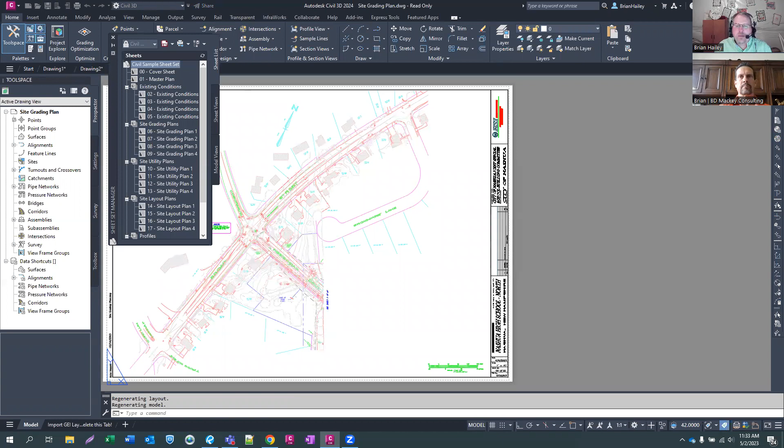All right, so this is just one of the sample files that comes with AutoCAD, for the sheet set manager. And the problem is when you have SHX fonts, right? So we got these evil SHX fonts. I don't know if y'all can see that or not, doesn't really matter, they're just evil. There we go, all right.

So when I plot this, typically what it would do is it either wouldn't do anything, and then you'd just have lines in your PDF that are just lines, or it would create a markup in the PDF that you could then search for, right? But then you have a whole list of markups in the PDF, and it's just really annoying.

So the command is, what is it? PDFSHX is the command. And before there were two variables to it, 0 and 1. So 0 was, just plot it, create it like line work. 1 was, hey, go ahead and create it, but put a markup on top of each piece of text so the PDF program could search for it. But now we have a value of 2.

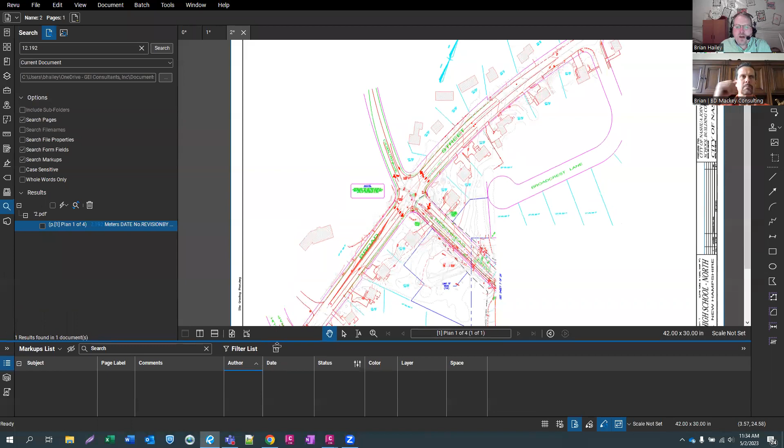So if I go into the help system here, you can see 2 creates hidden text from objects that use SHX fonts. All right, so I've got a couple of files here, and I plotted these using all 3 different methods. So here it is plotted with PDFSHX set to 0.

You can see there are no markups down below here in the markup list. But the problem is if I come in here and say, hey, I want to search for, I'm just going to do a Control F and search SEE SHEET 7, right? It doesn't find anything, because this is not text, this is just lines in the PDF.

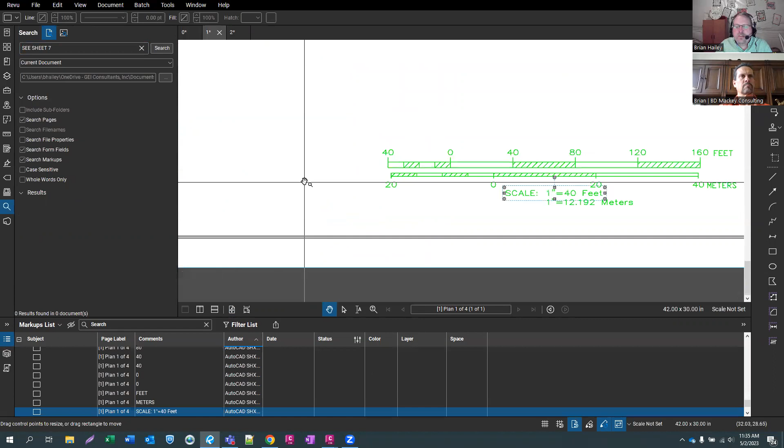Now, if I come over here to this file, and this is the one that was created with PDFSHX set to 1, right? What we have is we have this silly markup stuff on top of it, right? And it's just annoying, and your markup list gets full of them. You can see there's like hundreds of these markups in this sheet, and it's just so freaking annoying.

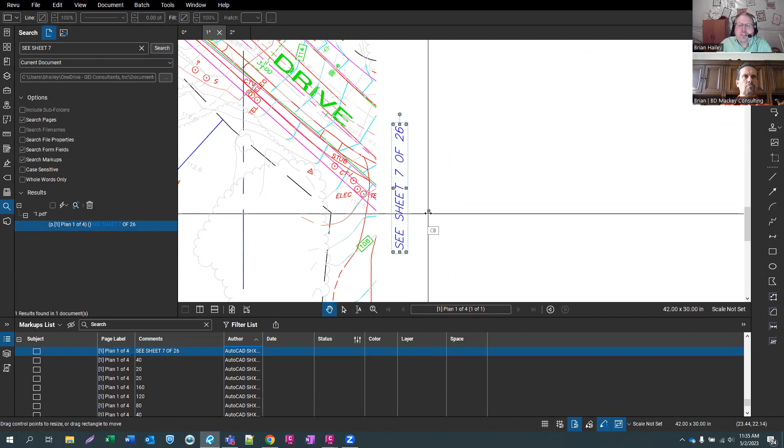But the nice thing about it is if I do a Control F and search SEE SHEET 7, it'll actually find it because it's in the markup list.

But when we have PDFSHX now set to 2, you can see there's nothing in the markup list. And if I select in here, there's nothing to select here. But when I do a search, Control F, SEE SHEET 7, it still finds it.

So this is a new system variable that's available now in AutoCAD 2024. When you decide to update to 2024, I would definitely recommend setting that as a default. Put it in the ACAD.lsp. Make sure it's always set.

I don't remember, is it saved? It's saved in the registry, so you could do it in the ACAD.lsp as well. Once you set it, you don't have to worry about it anymore. But I know I would have users that might accidentally change it. How they would accidentally change a system variable like this, I don't know, but I know somebody would. So I'm planning on setting this up in our Lisp routines that gets launched when we launch the program.

To always set this value to 2, because that's the way it should be. Unless anybody's heard of any reason why it should be anything other than 2, I'd love to hear if anybody does.

Do you know if that is the default value? I don't know why it wouldn't be, but I know the default value is 1. That's just stupid. Well, things like that, I know they try to keep historic settings, but there's features that are just so groundbreaking. Screw the historic crap and just change it to be what it should be.

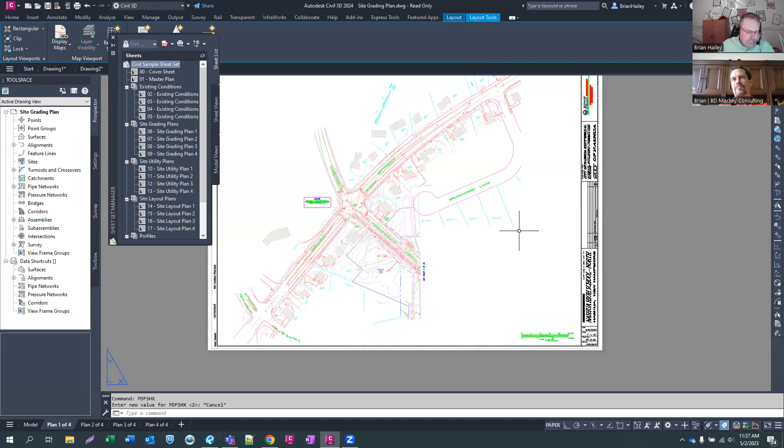I totally agree. Oh, Chris asked a good question: does it bloat the PDF with a setting of 2 versus 1 versus 0? I have no idea, but I've got the file saved here, so let's go take a look.

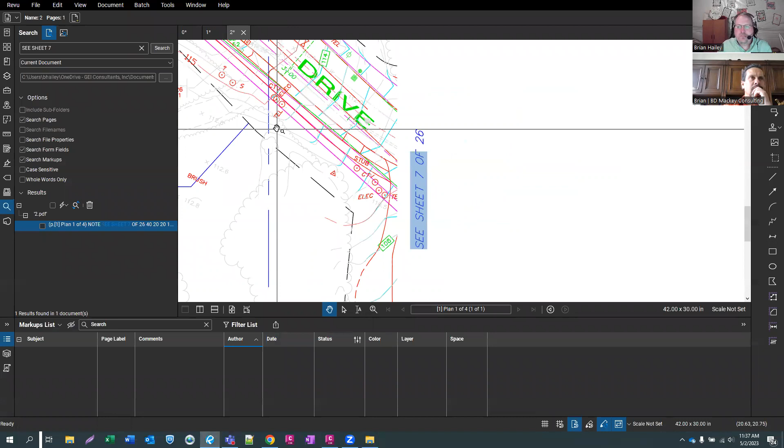See, I put them in here, I believe. Where did I put those? All right, let me just do this, this is an easy way to find it. Where's Revu? There's Revu. If you just right click on the tab, you can explore the document folder. This is a Bluebeam thing, I don't know if it works in other programs as well.

There you go. Yeah, I mean, it's not much bigger. It's 22 more kilobytes, so it's a little bit bigger, but I think it's worth it. If you never need to search for text, set it to 0 and your PDFs will be a little bit smaller. But it does make them a little bit bigger. That's a good point, Chris.

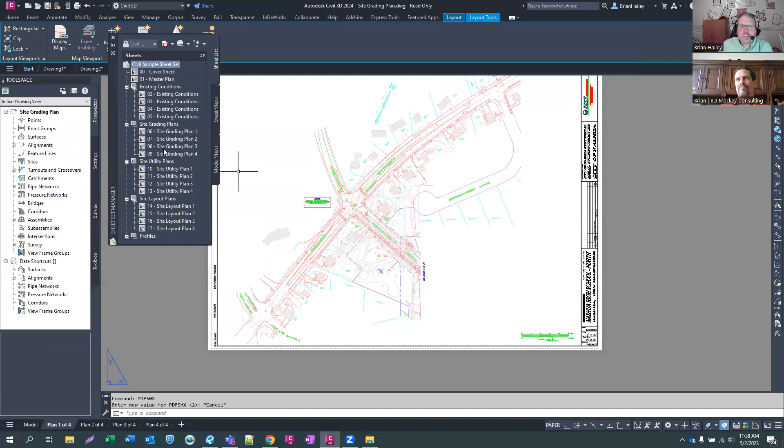All right, so another thing in Civil 3D. So this was an AutoCAD thing I was showing off. A Civil 3D thing that we have now is updates to the subassemblies brought in from Subassembly Composer. So if I bring up my tool space here, I've created a custom one, and I'm going to bring in a subassembly. What you'll notice is there's now an option to link directly to the PKT file. This means that if you have to go in and change the PKT file, you can update the subassemblies in your drawing just by updating them.

And it's really cool. Now, I did discover a little something to be aware of when you're doing this, so let me go ahead and show that. Let me browse to this tailings dam PKT file. And what I'm going to do is create an assembly, not intersection, create an assembly, whatever, don't really care what it's named.

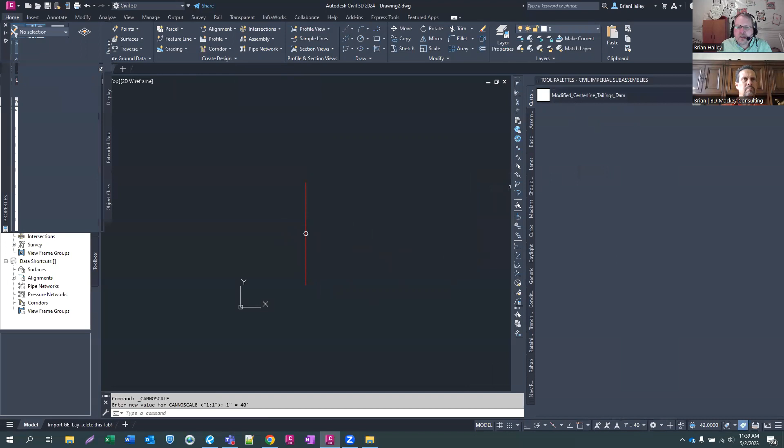Let's set that to 1 inch equals 40, and I'll go ahead and attach that there. All right, actually, let me do it in this drawing. Assembly, there we go, that's a little bit more default AutoCAD-like. All right, and so there's my assembly.

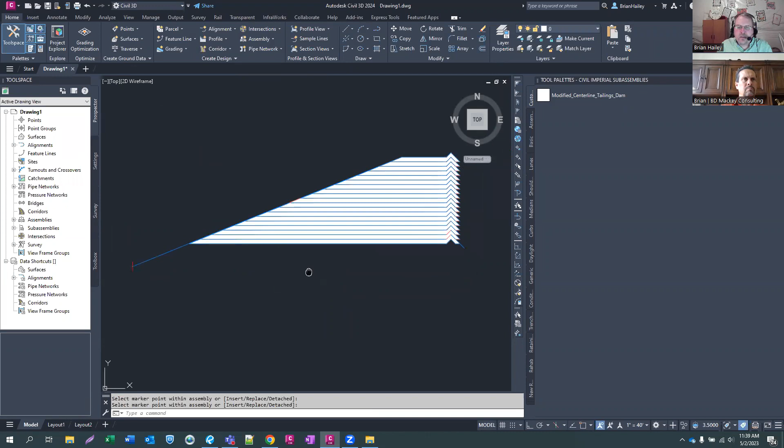And what I'm also going to do is do this again, but instead of attaching it to an assembly, I'm going to create a detached subassembly. So I choose detached, and I'll just place it in here as well. And what you'll notice under the Prospector tab, if I come down here to subassemblies, you'll see those 2 subassemblies in here, right? There's the one subassembly and there's the other subassembly.

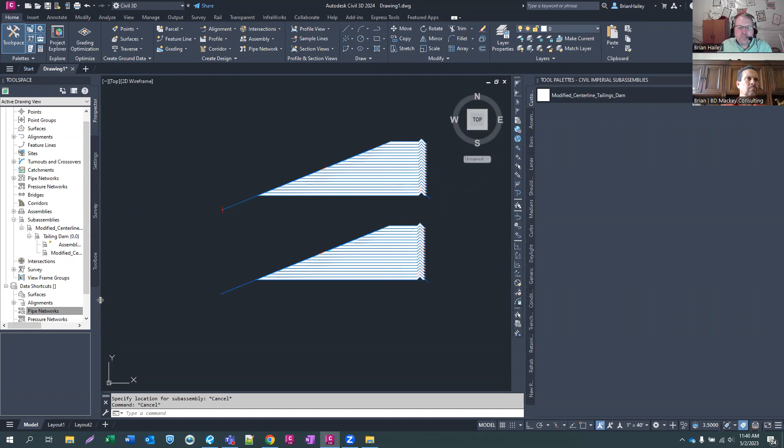Let me make this a little bit bigger so we can see it better. There we go. So now what I'm going to do is go edit the PKT file. Let me go open up my subassembly composer, I think that's just under Autodesk Subassembly Composer 23, 24. There we go.

I'll go ahead and open up that subassembly. And I'm just going to make a change. This is a horrible change, I would never actually do this, but I'm going to change the slope of this very first link here. So instead of using the value that you can input, I'm just going to force it to be a 1-to-1 slope. All right, I'll go ahead and save this.

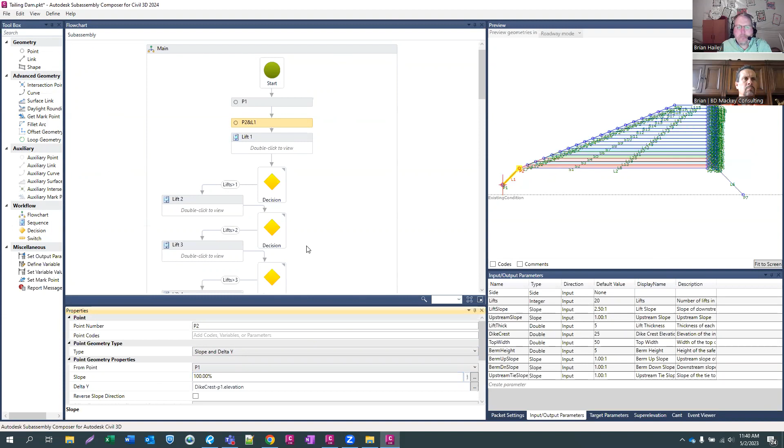Back in CAD, if I refresh my subassemblies, you can see they're now out of date. But if I bring in a new one, and I'll make this one detached as well, you can see the new one now has that new slope, which is just fantastic. This was so annoying in previous versions. You'd have to restart CAD and get things off the tool. Just nasty. But now it works just fine.

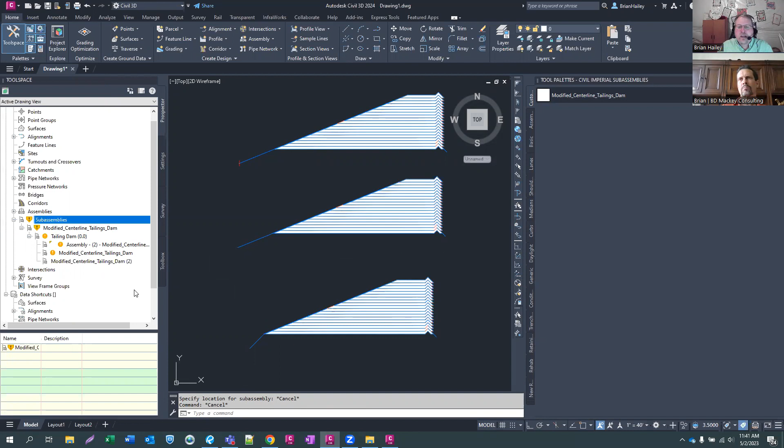For the subassemblies that you currently have in the file, all you have to do is right click on this and choose update all assemblies. And what you'll see is all of the subassemblies get updated, well, except for this one. So what I've discovered is if it's a detached subassembly, it doesn't update automatically. It seems that it has to be attached to an assembly.

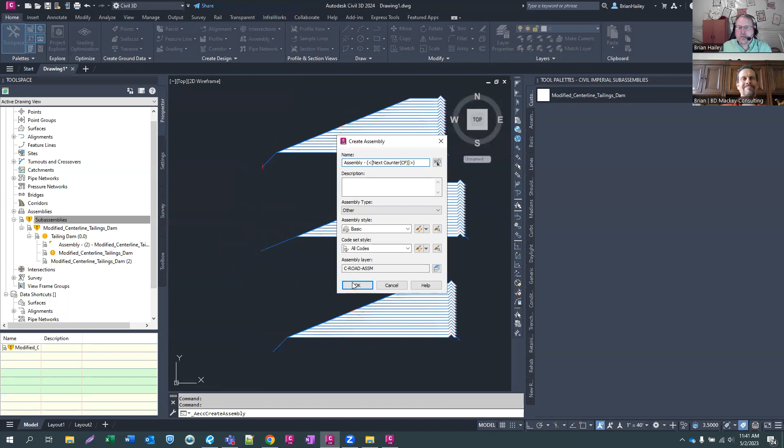Now, I haven't actually tried this. What happens if I take that and attach it to an assembly? So if I create a new assembly here, and I say, hey, I want to add to assembly, and I want to add it to this assembly, then it updates. So interesting, your detached subassemblies don't update when you update your subassemblies.

So those are some of the things that I think are going to be handy when it comes to using the 2024 version. I'd love to hear your thoughts.

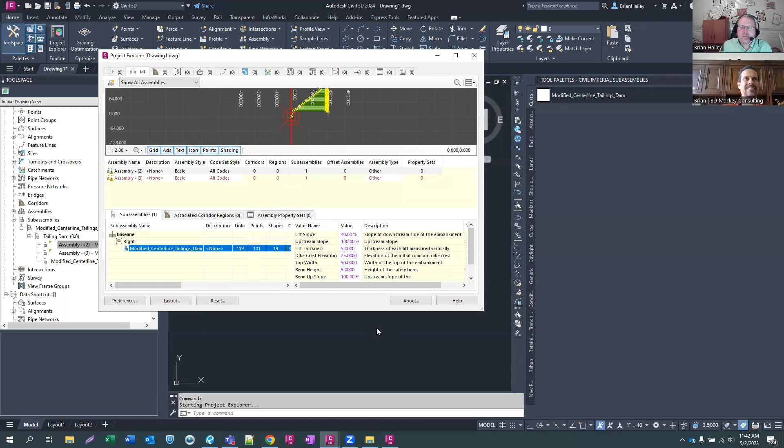Tom said it would be nice to have an open PKT and SAC option and right click. Oh yeah, that would be so nice, just right click on here and choose open. You can open in Project Explorer, which I guess is cool. Project Explorer comes with 2024 now as a default, you don't have to install it separately. So that's nice.

So I guess this can lead into the first question. What is your favorite 2024 CAD improvement? You showed two new things in 24, are any of those your favorite or is something else? You know, I don't know yet, I haven't had much chance to play around with it a whole lot.

One of the other things that I know is available is under pressure network. So if I go to the settings tab and if I go to say fitting styles, and I think this is cool - if I go into a fitting, you know, this would be like for an elbow. I thought there was an option in here. Oh, there it is, you can display as a user-defined block. So he's like, hey, I want this elbow to look this way in plan view. But when it's a vertical bend, it doesn't make a whole lot of sense for it to be bent horizontally.

So you can actually choose a custom block for vertical bends. So if I have a horizontal bend, it's going to use one block. If it's a vertical bend, it's going to use a completely different block. So that's kind of nice. I've had bad luck with pressure networks recently, so they just do some really odd, bizarre, weird things. So they still need a lot of work.

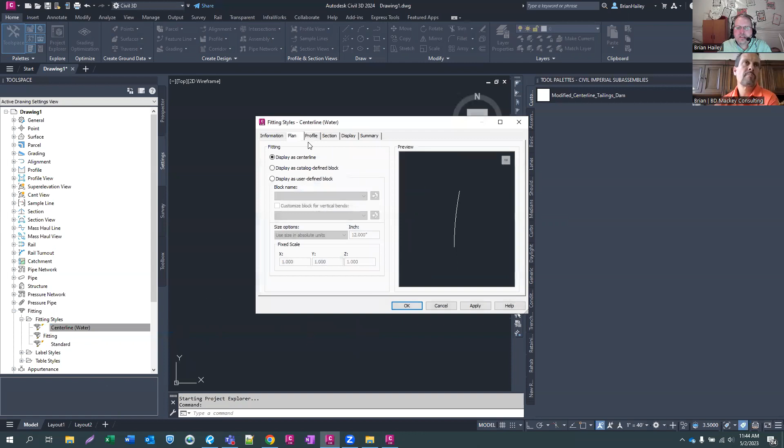But that's a nice thing. I think if I remember correctly, you have the display as user-defined block - I think this is new as well for the profile. I could be wrong on that one, but I'm not sure. I haven't had a whole lot of time to get in and play around with all the features in 2024 yet, but those were a couple that really stuck out to me.

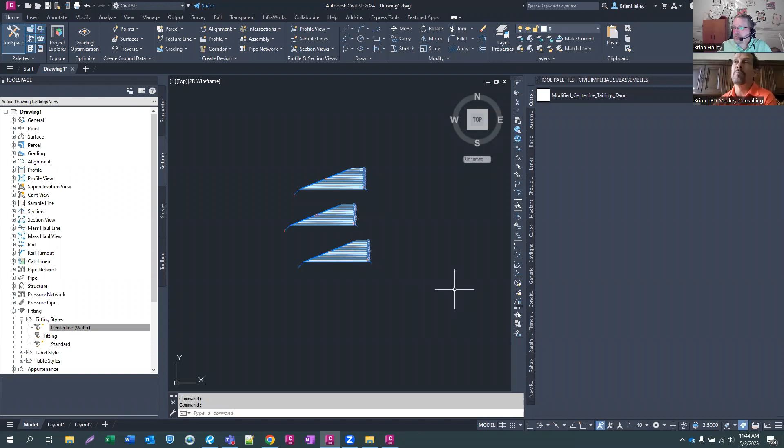Brian said that was needed badly - I'm assuming he's talking about the block visibility thing. And then Brian also said he found out enable DS multi-thread equals 1, and that's when you're setting your working folder over a VPN, he's found much faster speeds.

Ooh, that's a new enable DS multi-thread. What is that? It doesn't find it in the search. Let's see, enable DS multi-thread... Reads files and checks subfolders in sequence while setting the use multi-threading to read files and check subfolders. So to use multi-threading, well, that makes sense. If you have more than one core on your computer, I would like to be able to use them.

But yeah, by default, it looks like it's set to off. Thanks, Brian, I'll have to give that a try. Is this new in 2024? Is it in 2023 as well? Do you know, Brian? New in 2024, okay, 2024. Cool.

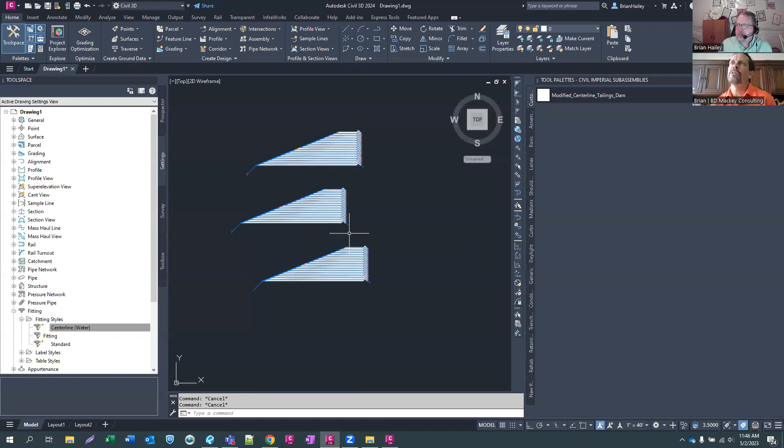All right, so only a few more questions. As Brian's talking, if you guys come up with other questions, pop them into the questions and answers. But we have one here from Lisa saying, can you walk through CAD Standards Manager?

CAD Standards Manager. Are you talking about just the concepts of CAD standards, or is there something specific that I don't know about yet? Are you talking about like the CAD standards checker?

Let's see, that's under, I think, no, it's down here. If I remember correctly, where's my CAD standards? It's one of these, I think. CAD Standards Checker, okay. Do I have it on? I thought it was down here. It's been a while since I've used this. Okay, it's not there.

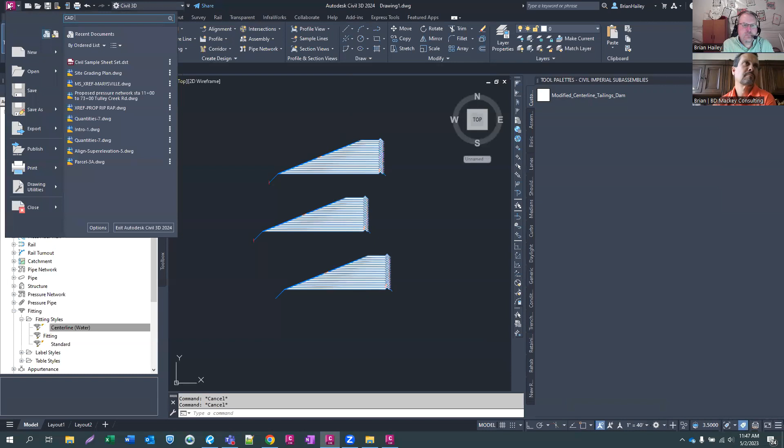So yeah, there it is, under Manage CAD Standards. Okay, so really there's two different topics here when it comes to the CAD standards checker.

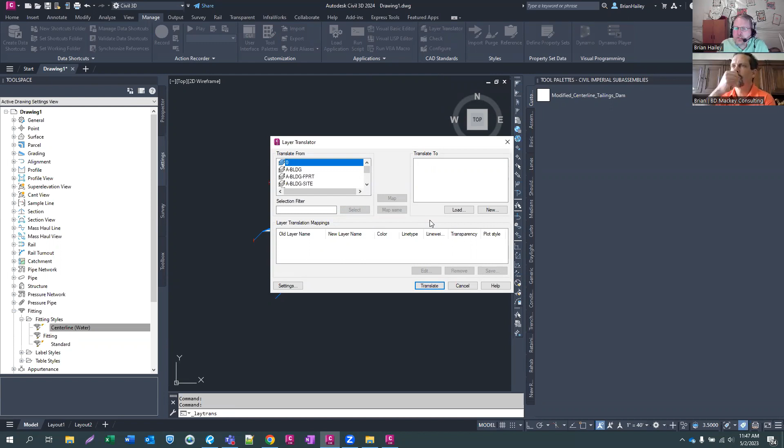You have what's known as a layer translator. This would be great if you're constantly getting a set of drawings from one source and you want to take their layers and convert them to your layer standards. For example, working with a surveyor who is set in their ways and won't use our layers, but uses their own layers consistently. So what we can do is create a layer translator.

Let me make this a little bit bigger here. So over here on the left, we have the layers that are in this drawing, and over here on the right is what we want to map them to. Now, in order to map them to something, you have to have the layer. So I'm going to go ahead and load a drawing, and I'll use the GEI template here. Let's see, CAD support, Civil 3D templates.

So when the surveyor sends me a drawing and it has the layer A-BLDG in it, that's not part of my standards. I would much rather it go onto this specific layer here, and I just kind of picked one at random. So I can now map this, and it's going to take anything that's on this old layer and put it on this new layer, and here are the properties of the new layer.

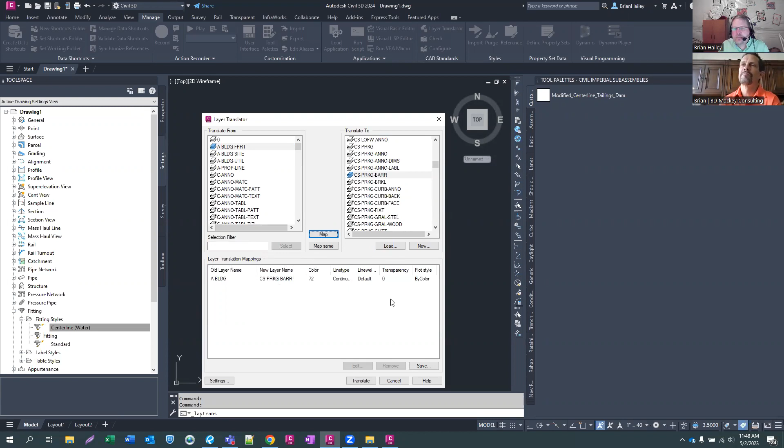Now, you might have some layers that are exactly the same, so you don't want to have to go through and pick it over here, like layer 0. I don't want to pick layer 0 over here and then layer 0 over here and then map. You can just click map same, and any layers that have the same name will map to each other. So it's going to take the C-road-mark from their drawing and map it to the C-road-mark from my template, and it'll set my layer standards for that layer.

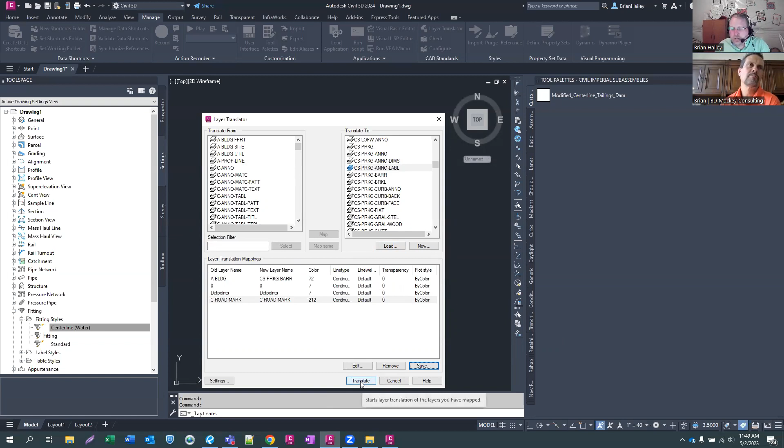And then you can go through and do these for the rest of them. Once you're done, you can save this as a standards file. If I just click save, you can see it's saving it as a DWS. So the next time you get a drawing from that person, you can just load that DWS file and hit translate, and you're done. All of their layers are converted to your layers. So that's one aspect of it.

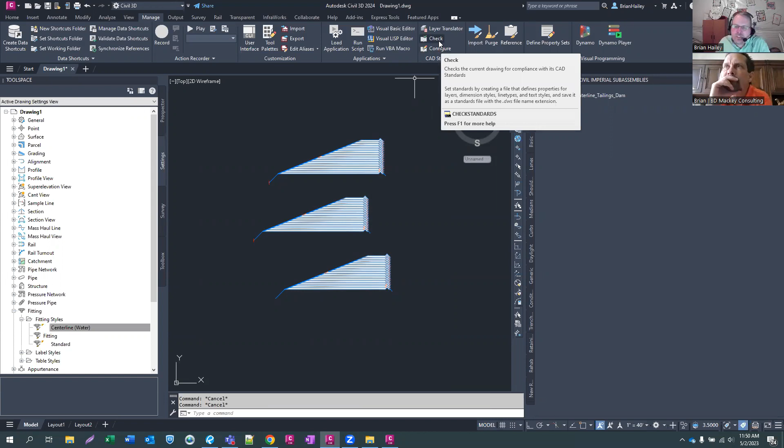Another aspect is, I should also clarify the configure option, which it looks like you're going into. Yeah, so we can also check our drawing against a standards file. Basically this says, okay, the way this drawing is set up, does it meet our standards? If I come in here and choose check, it says hey, there's no standards file set up, so it's not going to work yet, but we have to apply a standards file.

So what you need to do is create a standards file that has all of your layers, all of your—let's take a look—all your dimension styles, your layers, your line types, your multileader styles, your text styles. You have a drawing that has all of that in it, and then save it as a DWS, a drawing standards file.

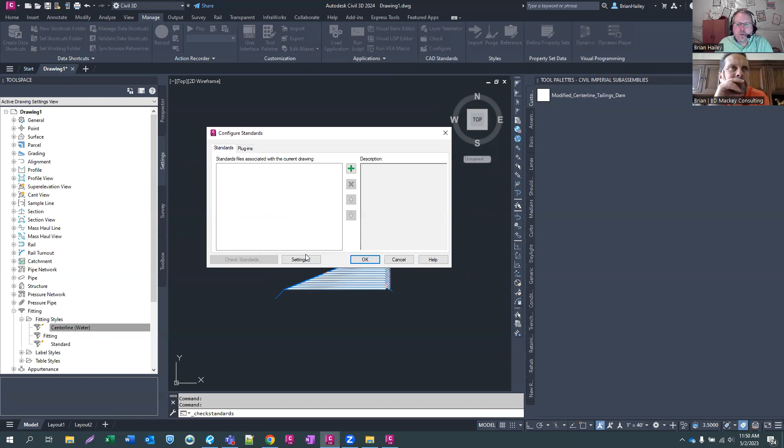So let me go ahead and load one up here. I'll go ahead and add a standards file, and we have ours. CAD Support, Civil 3D 2023 - I think I put it in the template. Yep, there we go. So you can see these are DWS files, and it's basically our template saved as something else - actually no, because I created this overall standards file, and this has all of our standards in it.

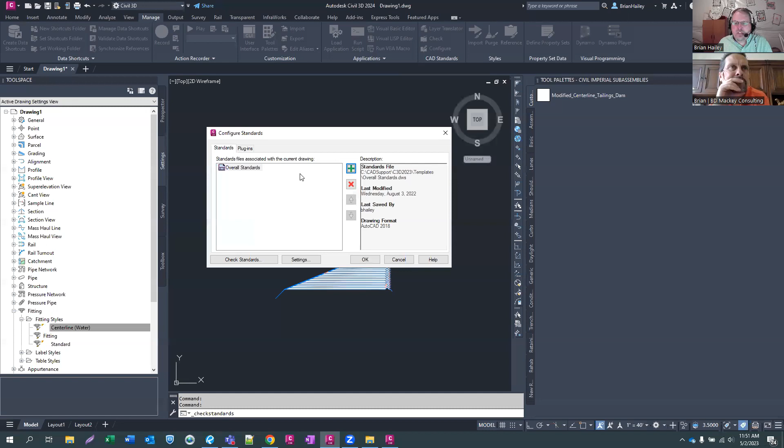If I come in here to the settings, I can do different things. For example, I can disable the standards notification, so if somebody is working in this drawing and it has a standards file assigned to it, when they do something outside of the standards, they won't know about it. You can display an alert upon the standards violation, or display the standards status bar icon, check standards settings, and you can automatically fix non-standard properties.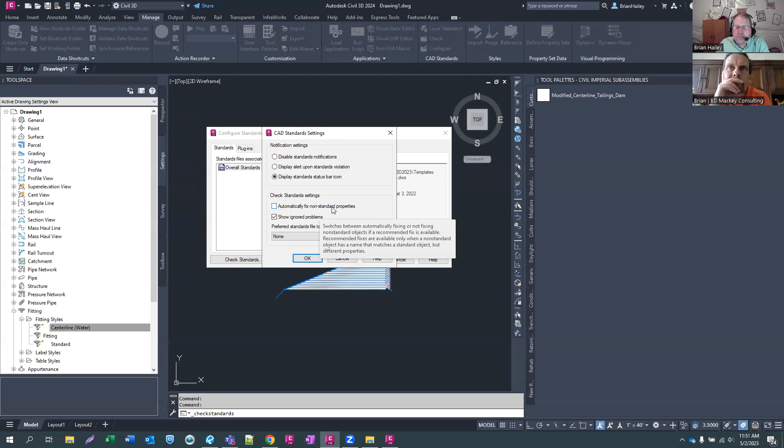So if I go in and create a layer that has the same name as a standard layer, it'll go into my layer and fix all those standard properties to match the layers that are in the standards. So I'll click OK now, and now I can check the standards.

It comes through and says, hey, these are all of the issues. So layer 0, the properties are non-standard - I'm going to go ahead and, I don't know why it's not letting me fix it. I'll just choose next, and it goes to the next one. It's probably because of that.

So here's a non-standard layer. C-ANNO-TABL-PATT is not one of our standard layers, so I want this to go on the A-ANNO-TEXT layer. I'll go ahead and fix that, and it's going to convert that layer in my drawing to match the layer in my standards. You would just go through and set all of those correctly - that's kind of the way the standards checkers work.

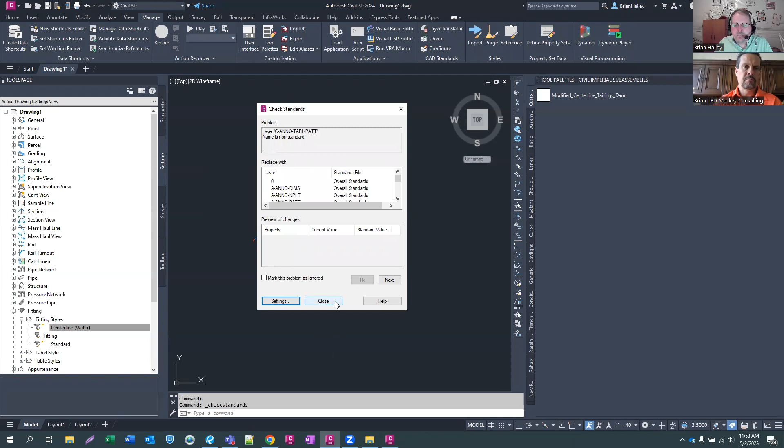This will go through and check things like dimension styles, text styles, etc. Hopefully that helps you out. Do you have any other questions on that?

Oh, you got rid of the question. Who was that again, Brian? It was Lisa, sorry. Lisa, no worries - if you have any other questions on that, let me know and I can get into more depth.

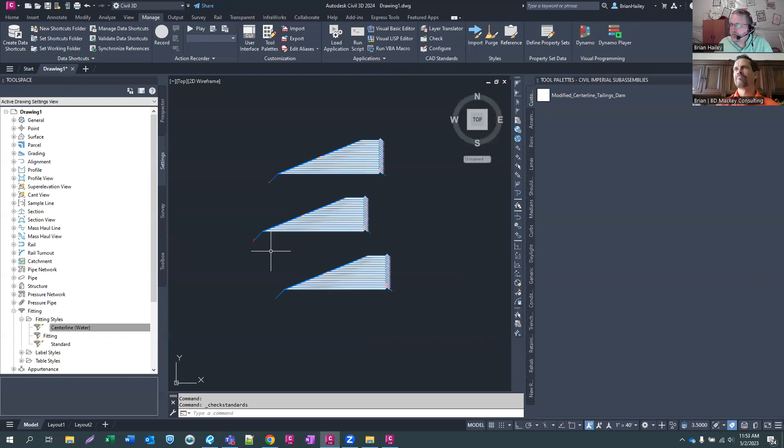Great. Since you're still in Civil 3D 24, we'll go to the next question from Jason: have you tested the new subassembly deployment tricks in Civil 3D 2024? I have, and I showed them off at the beginning - that was what I was doing with all of these here.

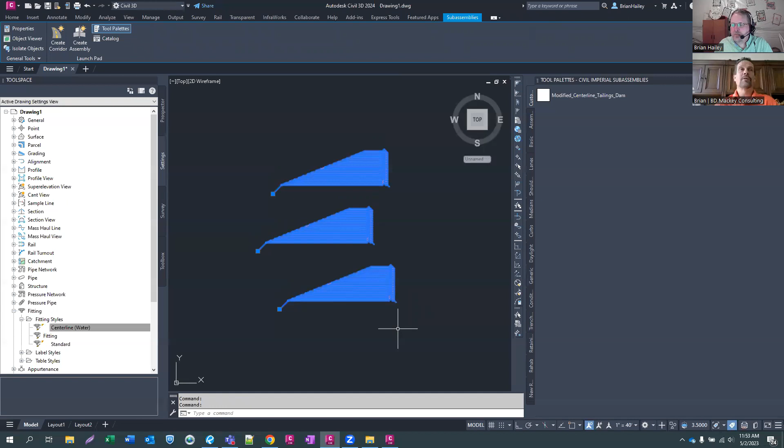I think you said the deployment tricks. I think that's what he's referring to - correct me if I'm wrong, Jason. Same thing. Yep, same thing.

All right, then we will jump into a question from Scott: how about BMP for 5 miles of roadway and extreme topo, 1 mile pieces, question mark? I have no idea, I'm not sure what the question is.

Are you talking about like stormwater BMPs? That was a question from Scott. Yeah.

Profiles, roadway design - so you would like to see the process of creating plan and profile sheets? I'm not exactly sure what you're looking for here, Scott.

Best practice for dealing with a 5-mile roadway, break it up or all in one, running out of memory. Ah, gotcha, so performance issues.

BMP, best management practices - not like stormwater BMPs, like a straw wattle or a silt fence or inlet protection. That's what I was thinking when I saw BMP. My bad.

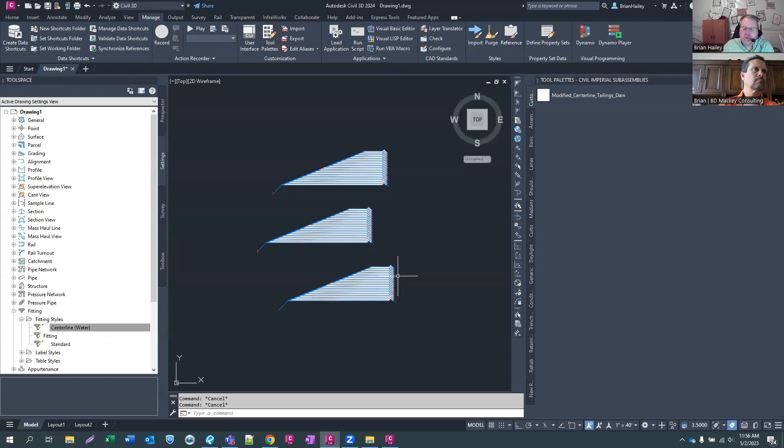If your surface is massive, you might want to tile it up, so you can create a crop surface. Let me see if I can find a decent surface and just do this here real quick. I'm just going to create a new drawing. I have a surface - let me set my working folder. So this would be... I think this is where it was. Yep, there we go.

So I'm going to bring in this existing ground surface - this isn't a roadway example, but it's the concept. All right, so I've got a surface in here, and this surface is massive, and I don't want to bring this surface into every single one of my drawings.

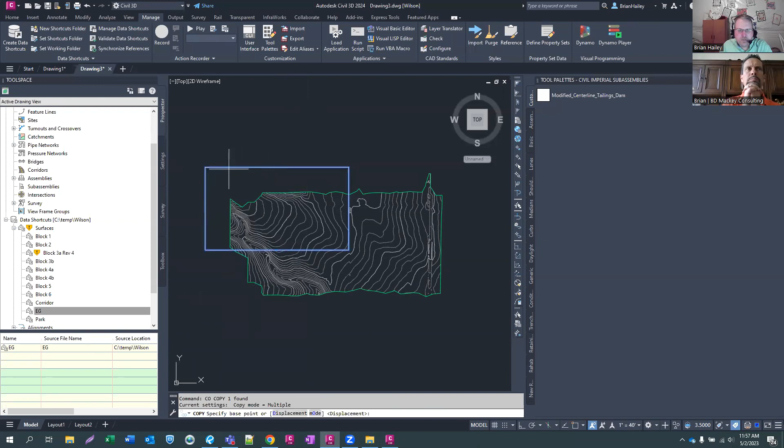So what I can do is tile it up. If it's a roadway design, you'd probably want to do it in linear chunks, but I'm going to cut this up into 4 surfaces. So let's see, we'll do that one there. All right, so those are the 4 chunks that I want to break this particular surface up into.

Maybe we'll adjust that a little bit, center it a little bit better. There we go, something along those lines, right? So what you can do is create what's known as a cropped surface.

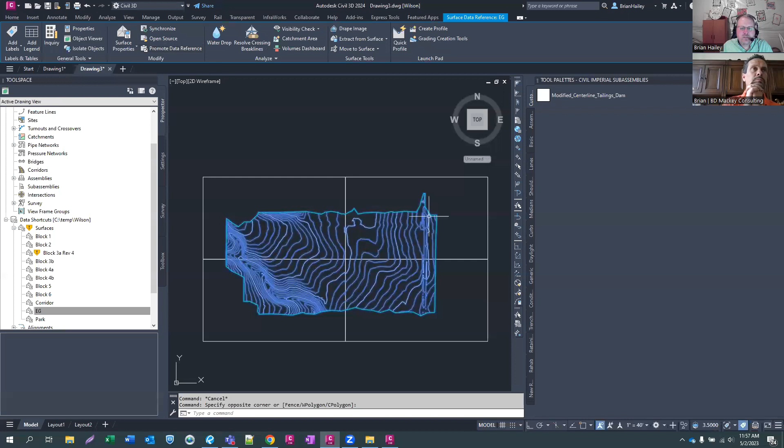So if I go to the Home tab, surfaces - I probably have to promote this first since that was a data reference. All right, so under surfaces, I can create a cropped surface, and what this will do is create a new surface in a new drawing. Oh, we got to save the drawing first.

Let's see, let's throw it there. All right, so this will create a new surface in a new drawing that is just a piece of it.

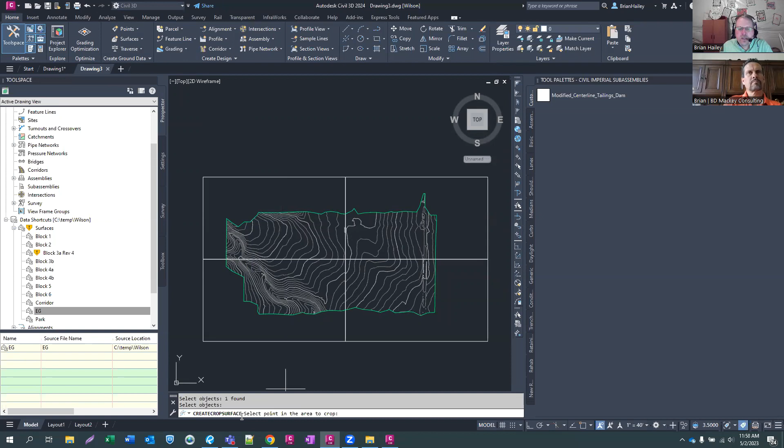So to select the crop area, I'll go ahead and select an object - I'll select that polyline, which is what a rectangle is. Select a point in the view area to crop. I'm going to have this create a new drawing, and then it's going to ask me for the template, so I'll just use the Civil 3D template since I don't have 2024 set up for the GEI standards yet.

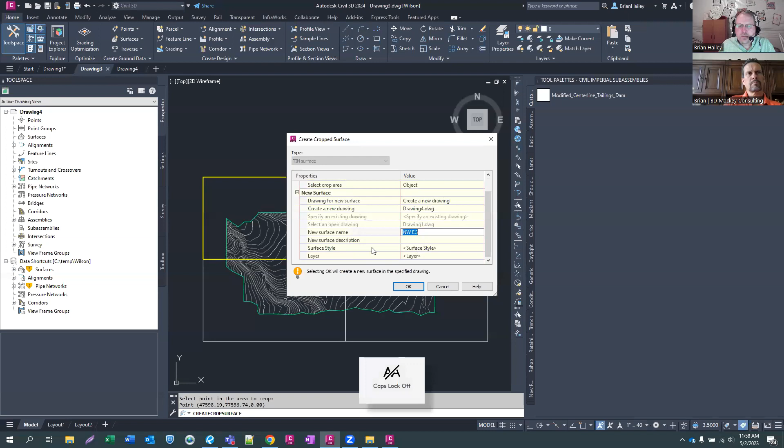Give this a name - we'll call this the Northwest EG. The surface style doesn't matter, the layer doesn't matter, you can put that stuff in there.

And what this has done is created a new drawing that has just that corner of the surface in there. Okay, maybe I should have done a better surface style. Oh come on, I like the rainbow surface - isn't that beautiful? Right, and so you can see it's just a piece of the surface.

And then I can create a data shortcut for this and then data reference it into the sheets where it would be displayed. So I could break this up into maybe 1 mile chunks, half a mile chunks, whatever you think would be beneficial.

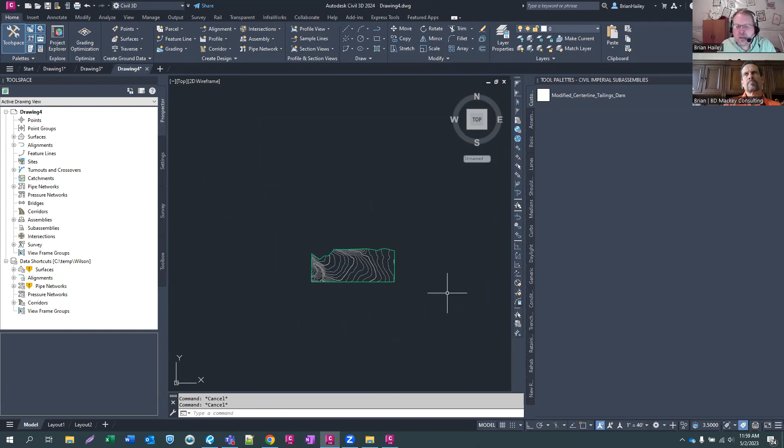And then this particular sheet is going to see 2 of the surfaces, so you just data reference those 2 surfaces in, and you don't have the massive surface for the entire project in your drawing. Now, what happens if the original surface changes?

Right, so let's see - you have two people questioning you on this, saying is that crop surface linked back to the original or static? Yeah, that's a great question. So again, what happens if this original surface changes? Well, this surface here won't change.

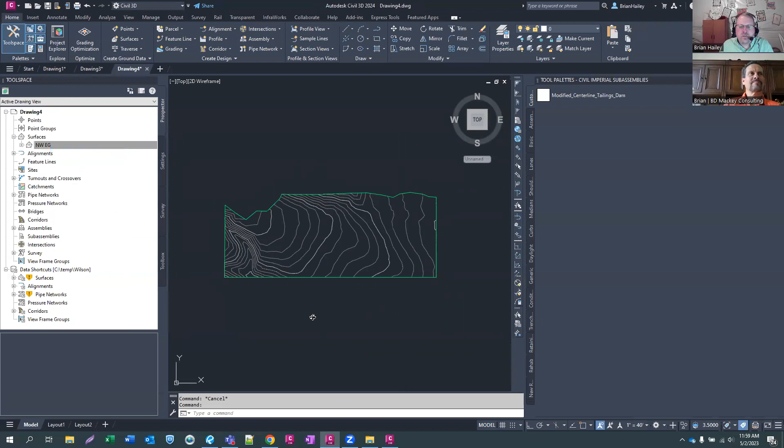And the reason it won't change is because there's a snapshot on it. So if I go into the surface properties here, you'll notice under the definition it created a snapshot. And basically what a snapshot is, it's saying hey, ignore all the data and just keep the surface. So when the surface rebuild happens, it starts at the snapshot and then continues on down through the list.

So if you want this crop surface to update when the other surface changes, simply get rid of the snapshot. All right, so let me go ahead and remove it from the definition completely here.

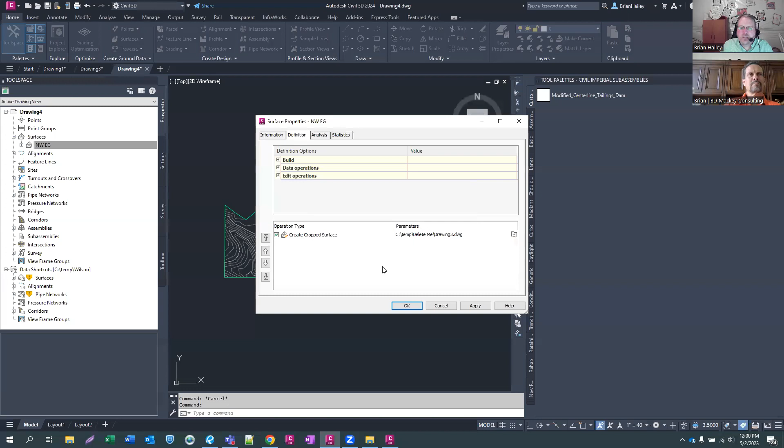And then I'm going to come back here and make a change to this surface. Let's see, let's just do something stupid here. I have to do this - surface, EG, breaklines, we'll add that as a break line.

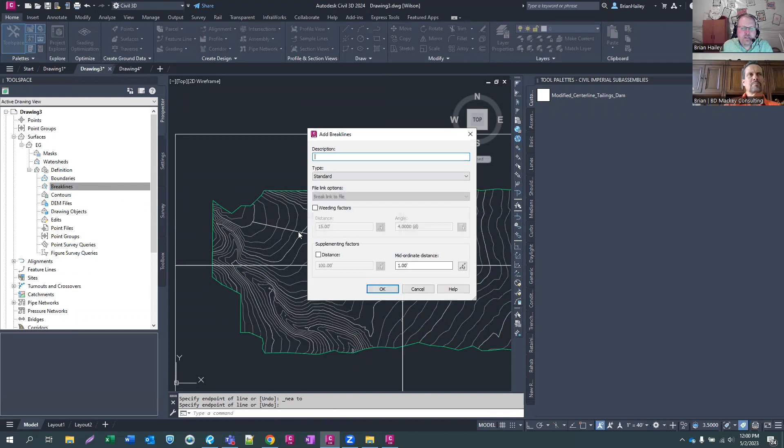All right, well that's lovely. Anyways, it's a change, so I'll go ahead and save this drawing. And then what you would have to do is go into each drawing and just rebuild that surface, so you can see the surface is out of date. So now when I rebuild it, you can see it now has the hole in it as well.

So it is somewhat linked to the original surface - you just kind of have to manually go update it, which isn't that big of a deal.

So that's one way to help you minimize the amount of data that's in any given drawing, because typically it's the surface that just bogs things down. You've gone out and flown the LiDAR for 5 miles of road, that's a crap ton of data. You don't want all of that data in your drawing, so create crop surfaces.

So Chris asked, would it be a better option to use subsurfaces with data clips under them? Basically that's what you're doing here, you're clipping out the data.

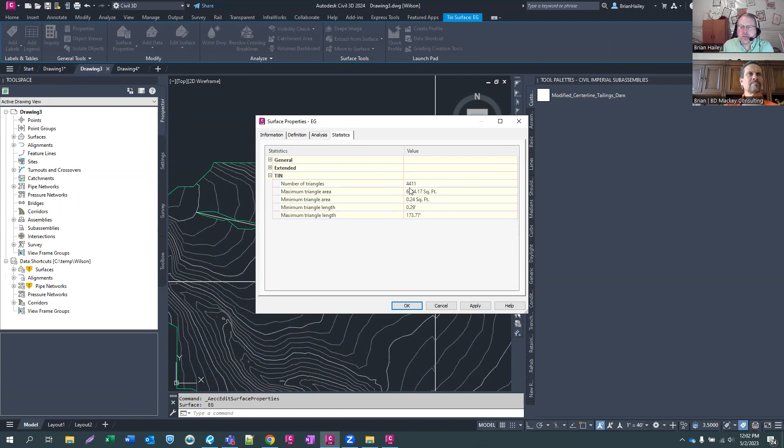So if I come into the source surface here and go into the surface properties, let's take a look at the statistics. General, where's the number of points? Number of triangles, 4,411. That's easy to remember. And if I come into this drawing, it should be about a quarter, depending on how well I drew that. You can see it's 1,049. So I have clipped out 3/4 of the data, I only have a quarter of it here.

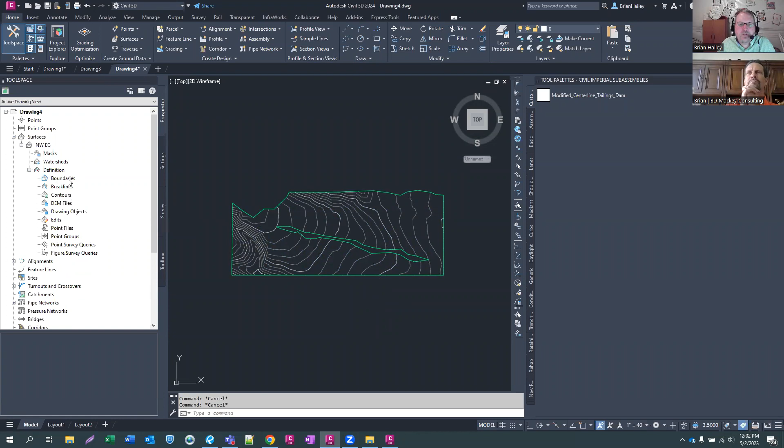Data clips, that's for if I don't want to... let me talk about that real quick. When you go create a boundary for a surface, you have the option to create a data clip boundary. Basically it says, hey, I've got a whole lot of data that I'm going to add to the surface, but I don't want to use it all. I only want this small little piece here. So you can put a data clip boundary around the piece you want to keep, and it'll clip out all the data outside of it. Now, that is not a real boundary, it is a data boundary, not a surface boundary.

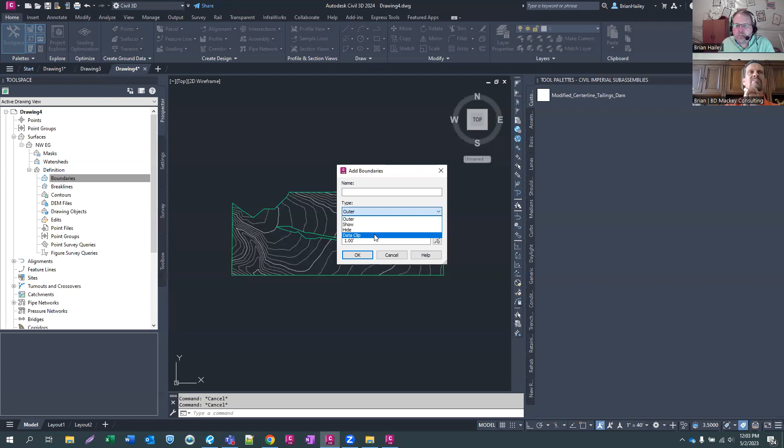Let me go open up a drawing here and I will demonstrate this. Program data, Autodesk... this is where it is? No. Not program data, should have been program file, sorry. Autodesk, there we go. AutoCAD 2024, C3D, help, civil tutorials, drawings, and let's go to one of the points, one that has a lot of points in it. There we go.

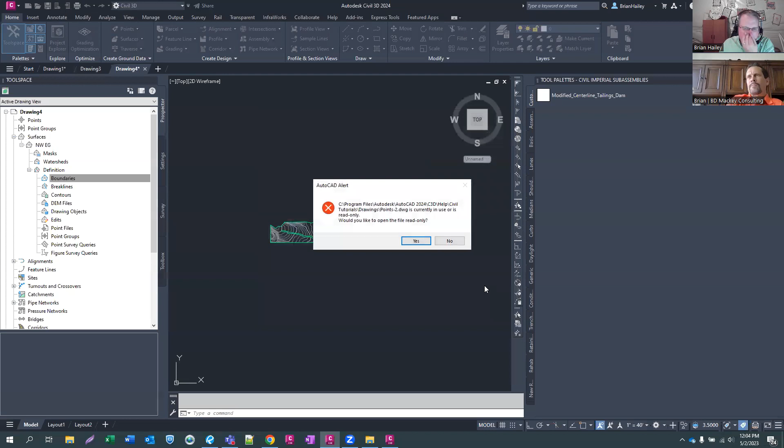So as you can see, this particular drawing has a whole lot of points in it. So I'll draw a nice little boundary, not a rectangle, I want a polyline in this case. I'm going to draw this nice little boundary that looks something like a horseshoe. What you do is add the data clip boundary to the surface first, and then as the data comes into the surface, anything outside of the boundary is ignored.

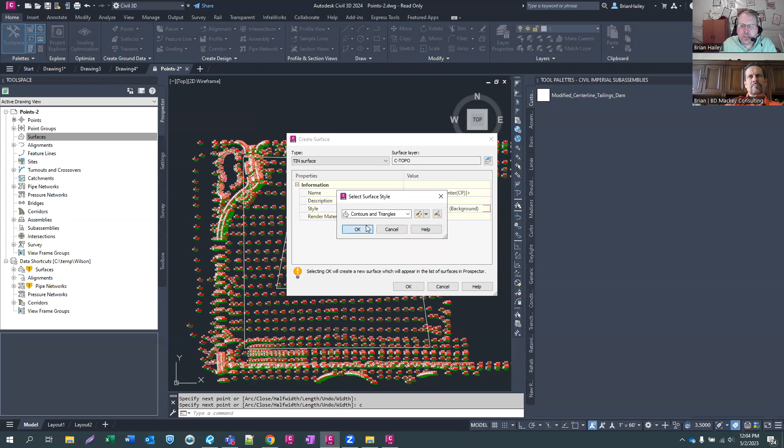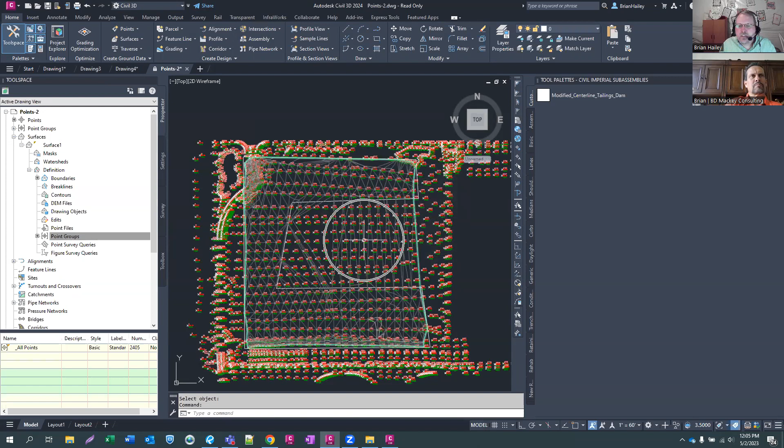That's all the data clip boundary does. So if I go create a surface here real quick, let's give it a nice triangular one, contours and triangles. There we go. And then I'm going to add that polyline as a data clip boundary, and add in all the points, the all points point group. And what you'll notice is it's still triangulating outside of the data clip boundary. It's not a boundary, it's a limit to what data gets added to the surface.

Now, if I don't want any surface here, I could just go add it as a boundary again, and this time make it an outer boundary. And then it trims it up. So that's just something to be aware of. I don't think a data clip boundary would necessarily be helpful for that big, long roadway type situation, I think crop surfaces would be much more beneficial.

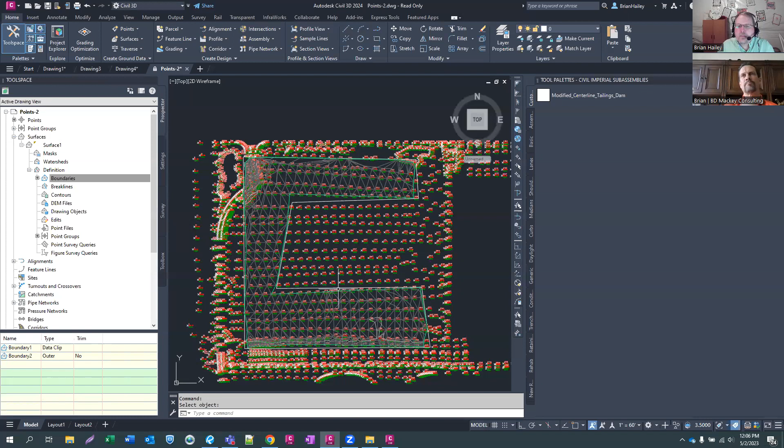Cool, and are the crop surfaces advantageous to doing this versus a boundary to the original surface? So Scott said, is there an advantage to your original idea versus a boundary to the original surface? The crop surfaces versus just a normal boundary, is that the question?

Yeah, so the crop surface is again a piece of another surface. If you wanted to, you could create 5 different surfaces using the same data and put boundaries around them. In that case, I would use a data clip boundary. But then you have 5 different sources of data, drawing A has a surface, drawing B has a surface, drawing C has a surface. If I change the existing ground data, I have to change it in all those drawings. Whereas with a crop surface, I change it in the source drawing, and then I just update all of those other drawings.

It makes sense to this non-Civil 3D user. Tom followed up with your horseshoe boundary there. What about a mask? I think that came up when you were talking about your horseshoe outer boundary versus that.

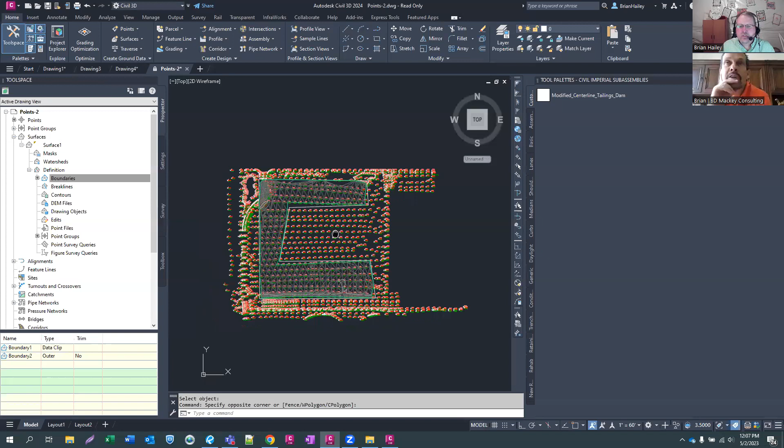All a mask does - so a boundary says remove the surface, so there is no data there. A mask says hide the surface. There's still data there. You can cut profiles through it, you can still label it, I just don't want to see it. So that's what a mask will do.

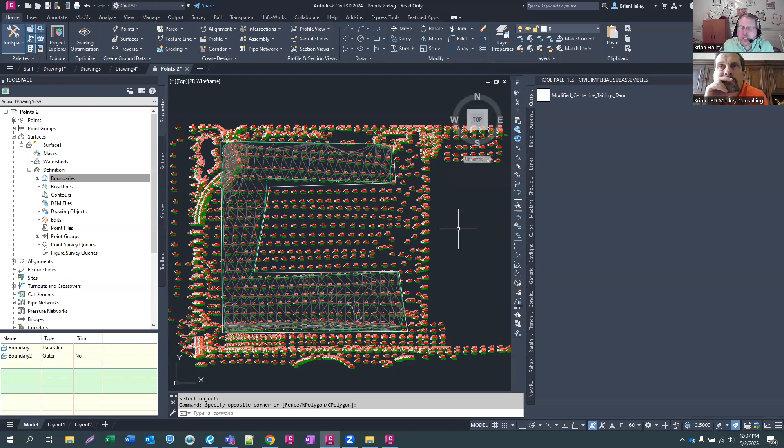So if you're doing volume calculations, it's still going to use the masked area in those calculations, whereas if you put a boundary around it, it won't, because there is no surface there. Hopefully that helps.

Scott said yep, he did exactly what you displayed, so at least you're validating what he had already done. I'm curious, Scott, did you know about the snapshot in the crop surface where you can disable that and have it update? I don't know, I'm just curious how many people actually know that. So he did not. Oh cool, so you did learn something new. Yes, life is complete - somebody's learned something from me.

Snapshots are used with that LandXML update as well. Yeah, so if you import a LandXML file, it'll create that snapshot. That way you don't have to keep the LandXML file. But if you change the LandXML file, your surface won't update - but you can remove the snapshot and then it will.

And Adam said, keep in mind, if you data reference a surface into another file to data clip and/or boundary it, your file will actually be larger because you have the original surface plus the data clipped result. Yep.

Yeah, I really think the crop surface is the way to go. And John agrees, I don't think people use crop surface nearly as much as they should. John agrees the crop surface is the best way to limit Civil 3D data in sheets outside of 2D Pline, XREFs, or contours, and DREF in surfaces with hidden styles.

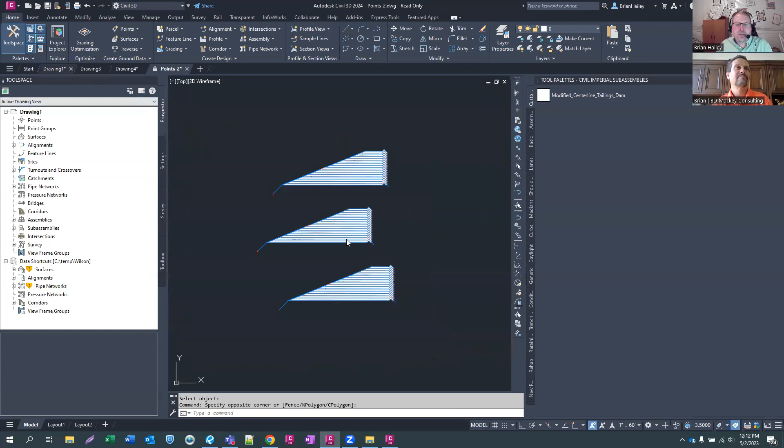I'll create a polyline and we'll go into units. As you can see, this particular drawing has precision set out to 4 decimal places. I'll change this, was he using degrees, minutes, seconds? Surveyor's units, we'll do surveyor's units, and set it out to something ridiculous like that. So that's the way it's set in this particular drawing. So if I WBLOCK this out, I just type W.

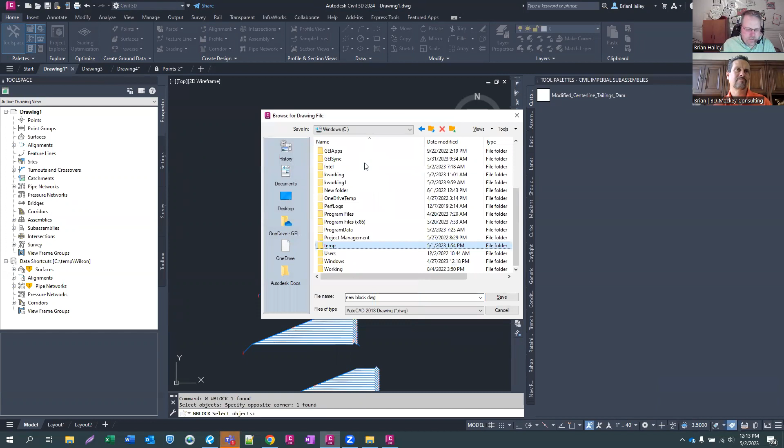Let's see, we'll choose objects. Did I select the objects? Can't remember, oh that's not what I want. Select the objects. All right, once selected, we'll go ahead and save this somewhere, C:\temp, delete me, we'll call that new block. Replace the existing new block. I don't think this has anything to do with it, but I'm going to say no for now. And then we'll go open up that drawing.

So my question, and this is actually something Chris came up with, I thought way back in my days of AutoCAD there was a setting to say what template you were using when you WBLOCKed something out. So it looks like it did maintain the precision and the units and everything.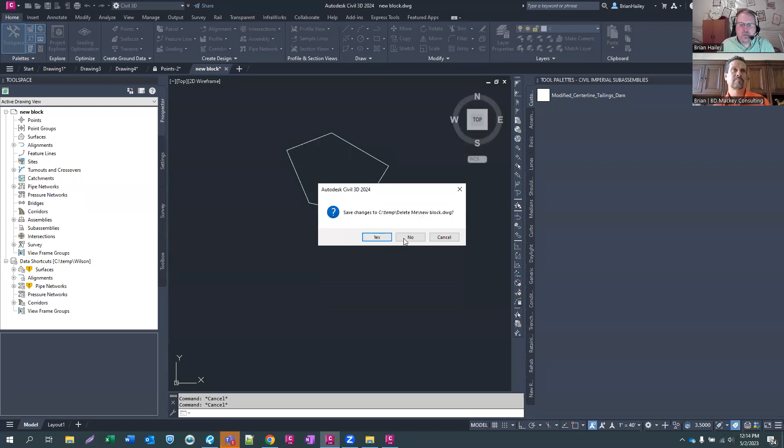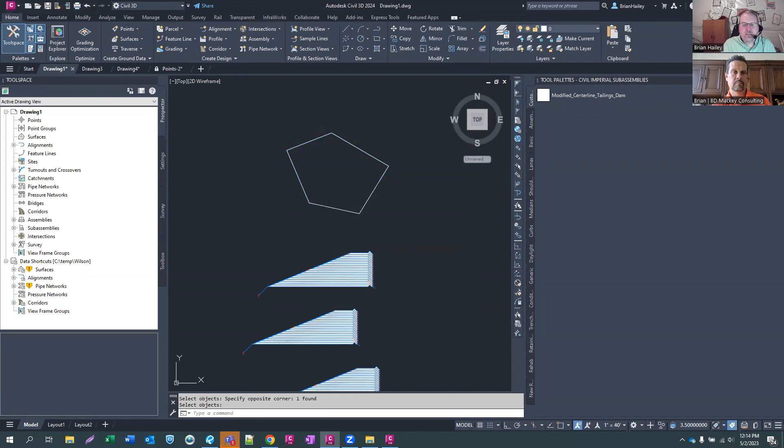So let's try that again, and this time I'll change the units again, just to make sure I didn't just magically pick the same ones. I'll change this to ridiculously big, and just a little big there. I hit yes that time. Yeah, so it is maintaining the units of the drawing that I'm WBLOCKing out of. So I don't know why yours wouldn't be saved.

I'm saying it could be a fix in 2024. I could launch 2023 here real quick. What version are you using, Thomas?

Thomas, are you there? He left, he's not going to see the answer to his question. Oh no. He might be on mute, he forgot to unmute his keyboard.

Simon asked, is this block used for AutoCAD? Then AutoCAD may convert the unit back. It's an AutoCAD command, so I don't think there would be any difference in Civil 3D. I think Simon's saying if you opened it in AutoCAD without Civil 3D, would it be different? It shouldn't, because it's an AutoCAD setting. Agreed.

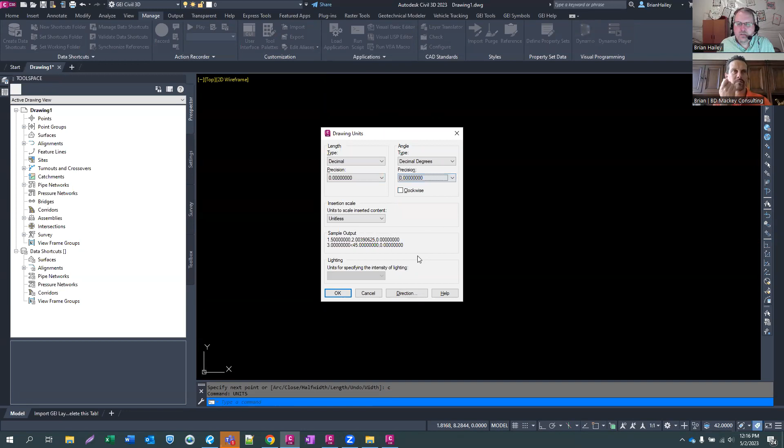Okay, so let's see, polyline, units, set everything ridiculously big. Did I close out of that other new block? Oops, wrong one. And C:\temp, delete me, a new block. Replace? No. Now if we open.

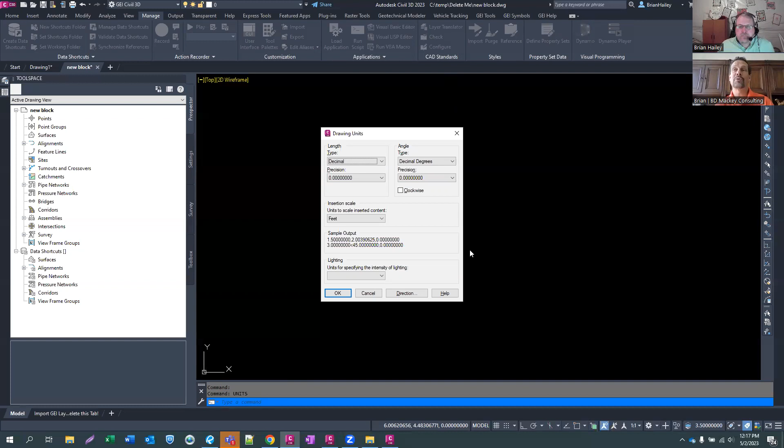Go into the units. Come on, you can do it. And they're both ridiculously high, so it's not a 2024 thing. So Thomas, I don't know why it's not preserving your units if you watch this after the fact, but we now know that there is some sort of setting, more than likely, that can be changed, because it's doing it to him.

Suppose we should go check the super secret units. So Simon did say he's noticed if he exports out of Civil 3D and then opens in AutoCAD, often his drawings are set to be unitless, even though he set units in Civil 3D.

Let's see, there's a solution. Oh, that's a great solution. Yeah, I posted up this question, I found out what it was, I'm just not going to tell anybody. All right, that's enough of that one.

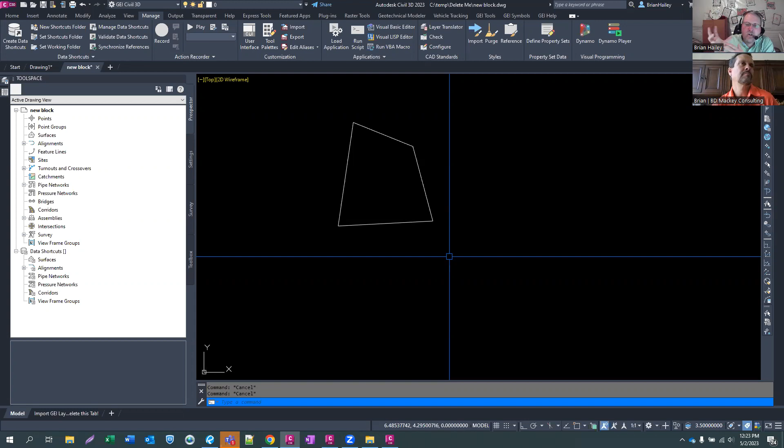And then you have your model drawings, and this is where you're doing your Civil 3D modeling. This is where the drawing is going to have my existing ground surface in it. I'll XREF in the existing line work to help me create the surface. I'll have my pipes in their own drawing, and in this drawing I'll data reference in the existing surface, data reference in the proposed surface, XREF in the line work, and then I'll design my pipes.

And then when you get to your sheets, you'll have things referenced into the sheet. So I'll data reference in surfaces and alignments and profiles, and then I'll create the profile view for that sheet. I'll XREF in the line work, and I only bring into the sheet what's needed for this sheet, right? Really, I can't stress it enough, only put into a drawing what you need to create that drawing.

If you can keep extra stuff out, do it. If you put everything into one drawing and XREF it into all of your other drawing sheets, then you're bringing in a lot of data that you just don't need. And we don't want to do that.

Hopefully that was able to answer your question. I know I'm a little passionate about it, and I speak a little fast when I talk about it, but really you just do it.

If you're working on a really ridiculously small project that's like 2 sheets, okay, maybe. But if you're doing anything of substance, then yeah, you really want to make sure you use data references, XREFs, create the sheets independent of each other. Maybe put 2, maybe 3 sheets in the same drawing.

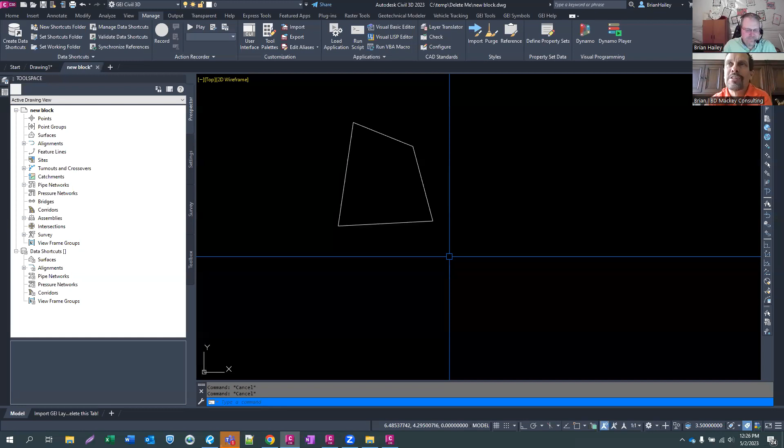I'd find it odd if they truly deprecated it, and if they got rid of that in Civil 3D, I find that odd because they literally just added that to Forma like a year and a half, 2 years ago, and now Revit has it. So just because we are getting transition areas, like, oh yeah, that's part of their default units on the Forma platform, or Forge, or whatever the hell it's being called this week.

Let's see, and I think it's great that Brian says he didn't know he could do it in yards. All of his drawings in the future are now going to be done in yards, and we don't have to worry about the survey. Yeah, and you can see in Colorado, we have NAD 83 US foot. We don't have NAD 83 international foot yet in Colorado. So it may be theoretically deprecated, but it's not.

So yeah, it's going to be a while before we can just say, what the hell do you mean US survey foot? It'll happen eventually.

I don't even know what you guys are talking about. The federal government got rid of that. I was told in '76 when I was in school that, hey, we're using all metric now. So why are you guys talking this whole foot thing? I don't know what you're talking about. Oh yeah, I had the same thing. So yeah, you and I went to school about the same time, in the same state, in the same general area. And so everything was, we're going to make the change to the metric system.

So everything was metric. I get out of high school, I join the army, and I go to Germany, right? Everything's metric over there. I get out of the army and I go to the university. It's international, everything's metric. I get to my first job and they're like, we need to put a 3-foot inlet in there, like 3 feet. Let's see, I'm 6 feet, so that's about half of me.